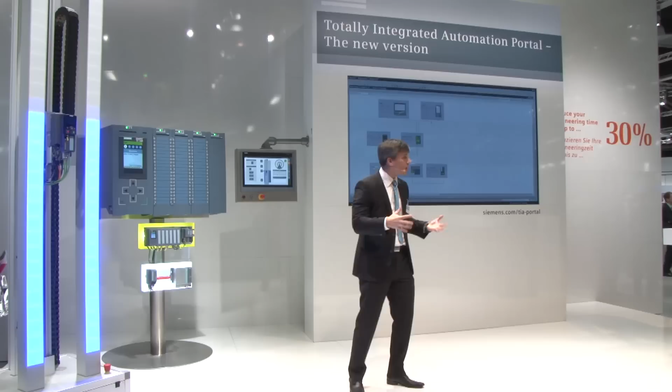For the first time, something we haven't shown is the network architecture, or something called topology view. All right, let's give focus to it. And so what is it? Essentially, every single connection from every single device, the first P1 to a P2 of device 1, device 2, we know all the interconnections on Profinet. So what does this give us? This gives us physical layer diagnostics for the entire network architecture directly in the engineering tool.

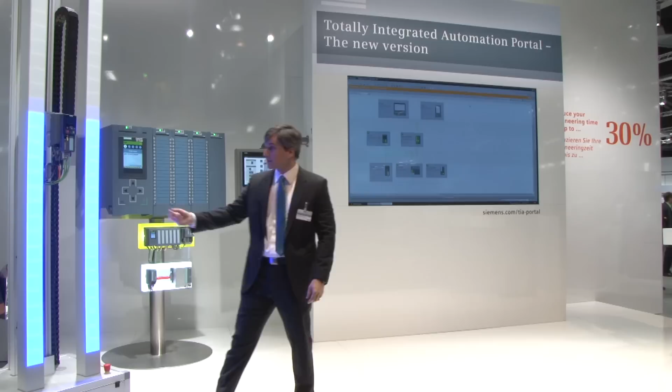All right, let's go online with it real quick, and let me show you what I mean. You get the orange bars across the top, so we are online with this actual project. And you can see the check marks and all the Profinet cables are highlighted in green. So for instance, if I come over to this drive real quick, let me pull out a Profinet cable, and you'll see that we have a network failure directly between the switch and that drive.

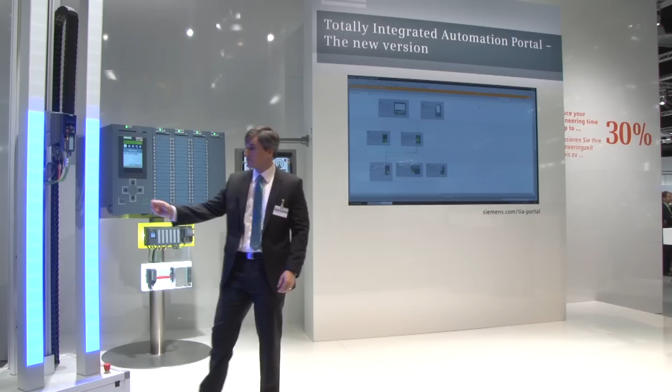That means if a tow motor was driving through here and knocked out a cable tray, you could go to the engineering tool and immediately find the network failure just like that. Solve your problem, get up and running, and mitigate the downtime. Problem solved. Trying to create engineering efficiencies in your daily work. That way, you can mitigate downtime in a service event, okay?

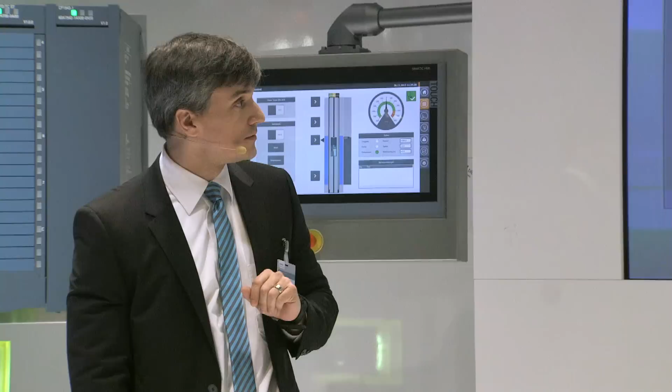So we've seen the network architecture, we've seen the hardware architecture, everything up here. Let's get this system up and running. So you can see from the comfort panel, we have something called Smart Access. That's how we're able to visualize this up here. And let's go back to the home position real quick. Get them up and running, turn power on, and go down to home position. Okay, so if we get the model running, let's see what happens. So it's kind of herky-jerky, something's wrong here.

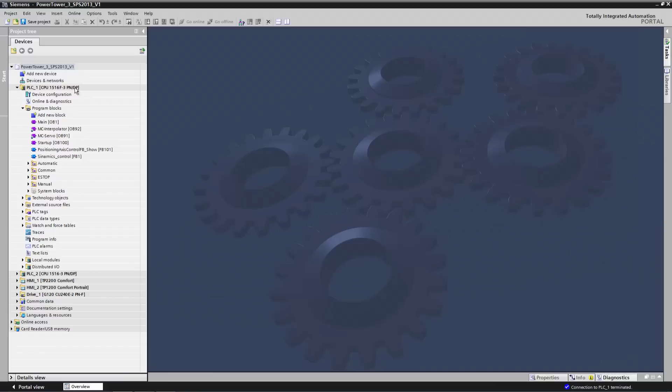Well, let's go back into the software and see if we can figure out what's going on. Let's go back online real quick, focus the CPU, go online. The orange bar across the top, and now you see we have some green bubbles here in the tree structure, but I noticed something right off the bat. You see one of them has a blue and orange bubble. So what that literally means to me from a visual standpoint is online and offline are different for that particular block. Let's investigate further.

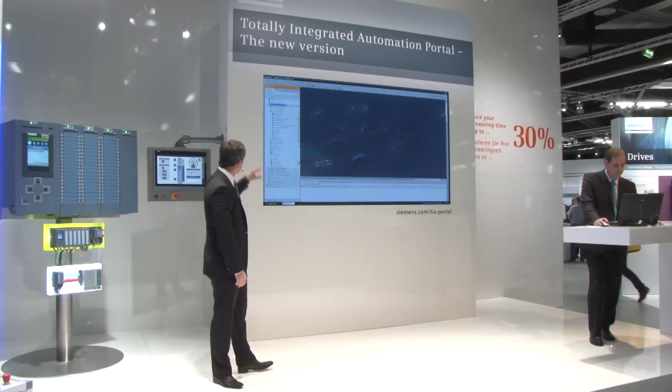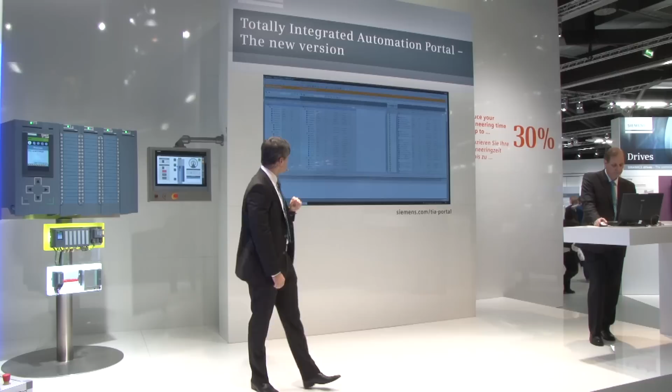Let's give focus to the CPU, and let's look at all the software components. Go to compare, online, offline. So now we're going to have a visual representation of all the software components for this entire project at this point. And for that matter, we could even filter. That way we could find individual problems, online, offline. So let's use the filter button. There's that FB1 again. We can still see there's a problem there.

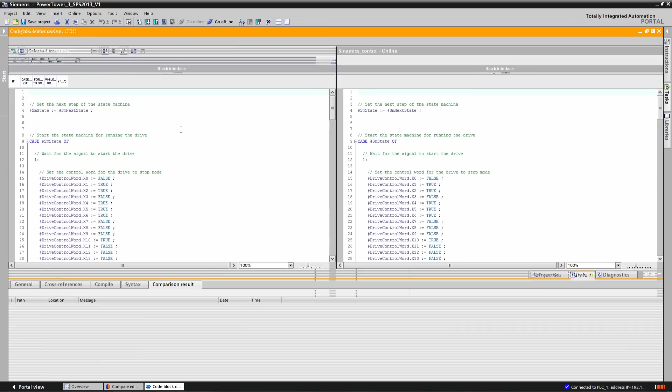Now if we want to investigate even further, we can go directly into that and look at the physical code in the blocks. So let's actually go do that now. You're going to see it, I believe it's SCL. Yep, it is SCL for online, offline. And now if you want to find the next potential difference between online and offline, we can use that icon. Let's go find it.

There it is. So we have a multiplication of 1.25 for the online program. I know for a fact that's not correct. I wrote the program. The offline is the master. So we've had some kind of unauthorized access and change of this program to solve a problem. Well, that's not what we want for this particular application. So let's go back and let's actually choose download to device. Let's execute it.

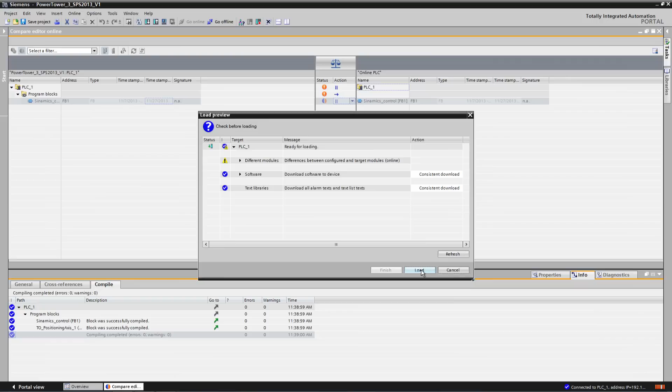Now it's going to compile the fact that we made this simple change. You'll see that we have this consistent download here. And what this means from the old generation to the new generation is in the new generation, we do the consistency download in the software, not in the hardware like we used to. So let's choose load. Now it's going to load to the 1516, and we'll click finish, and we've solved our software issue.

Okay, so since we had an unauthorized access, I want to make certain this doesn't happen again, right? We saw we clearly had some problems. There was some jerk in it. Well, we can actually add something called level 4 protection. Let's give focus to the actual CPU.

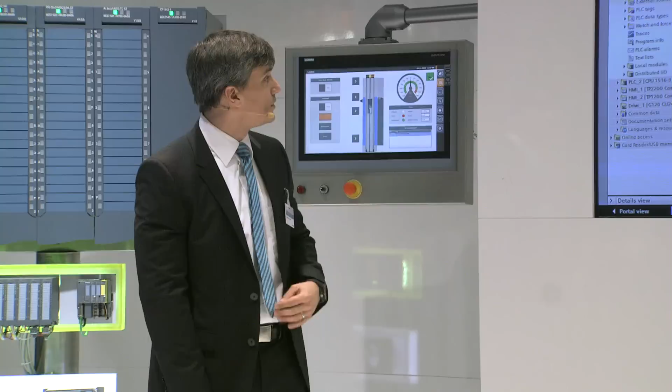Or we can show the know-how protection too. For instance, something different in our know-how protections, we have the ability to protect not only a single block, but the entire program. So if you're only concerned about the algorithm in one block, you can protect that block. Or if you're concerned about the entire process, you could highlight all and protect the entire process. So for instance, once you give focus to that particular block or the program, you click protect, add your passwords in, the block's locked down.

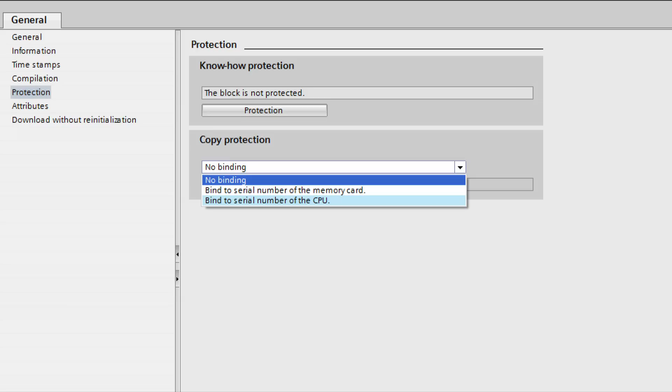You also have something called copy protection. The 1500 has to use a memory card. So what does this mean? We have the ability to bind the program to the serial number of the memory card, or you could bind the actual program to the serial number of the CPU, whichever you want. That way, somebody pulls that memory card out and you bound it to the CPU, guess what? They can put it in a different CPU, it's not going to work. The program blocks are not there.

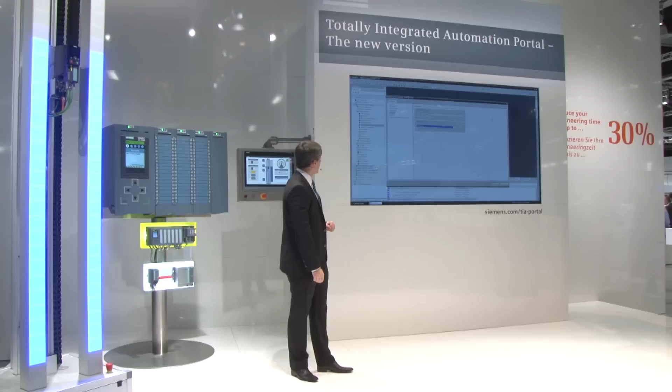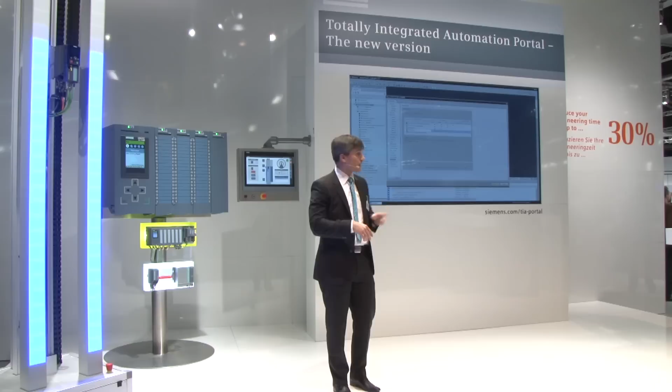All right, now let's actually do the access protection side of this. Give focus to CPU, click properties. You're going to notice down here at the bottom we have the protection level, and we see we have multiple levels available to us. The new one is this level 4 or HMI access protection. If we give focus to that, we have to give it a password. Of course, you have to confirm that password.

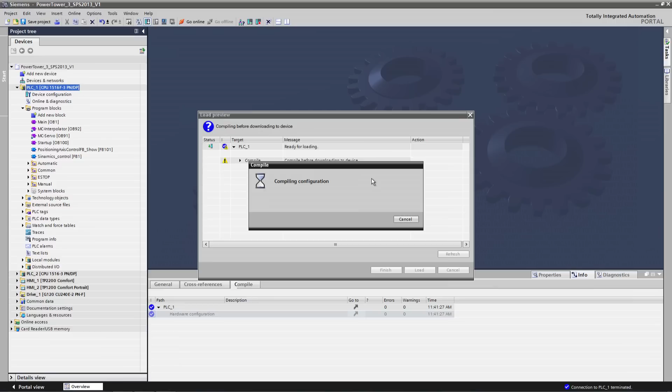Now let's say OK, and let's download to the controller. It's going to compile the fact we've added the password. And you see stop all, click on load. Of course, we've made an actual change, right? This password protection is an actual change to the program. Click finished, and now we've protected our CPU and changed the program.

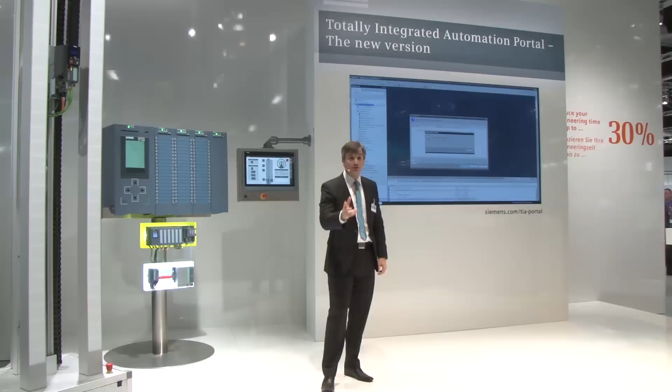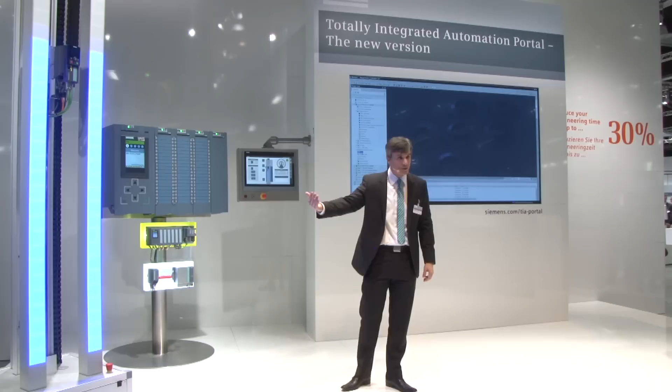Let's do a trace. How about that? Let's do something where we can look at actual variables coming from the drive and see if we can't figure out what's going on from the mechanical side. Well, if we go into trace real quick, we have the ability to have essentially an oscilloscope directly in the engineering tool, and you could even set this up if you have some kind of intermittent problem. Go away. You'll look at the variables you want to see if the trigger occurs. You could download this or view it actually. You could even download it to CSV file. That way you can solve your problems online or offline.

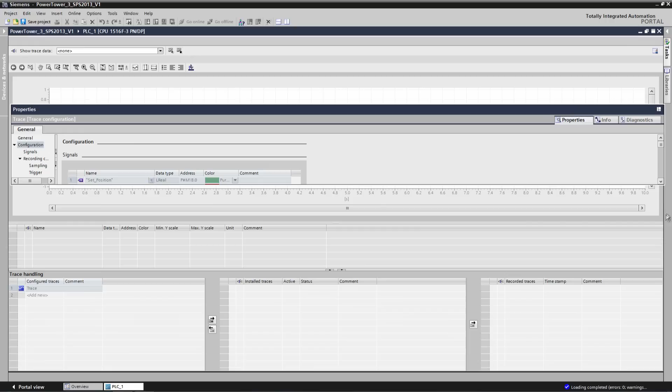If we give focus to that trace, we can actually go look and grab an individual predefined trace and load that in, so if you have multiple different types of traces you would like to use for a given potential problem. And in this particular one, you see we have a set position, a current position, speed, and axis error. Those are our variables we're going to look at. The sampling, you see it's for every one cycle, 100 milliseconds, we're actually going to make a sample for exactly 6 seconds. And our trigger, we're going to do 4 seconds before, 1,000 samples. So we'll know before and after whatever the event is.

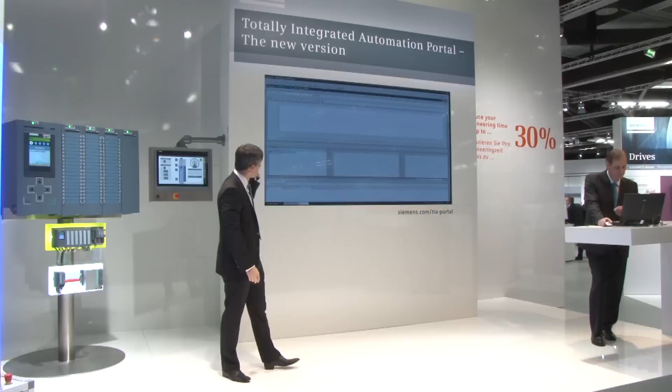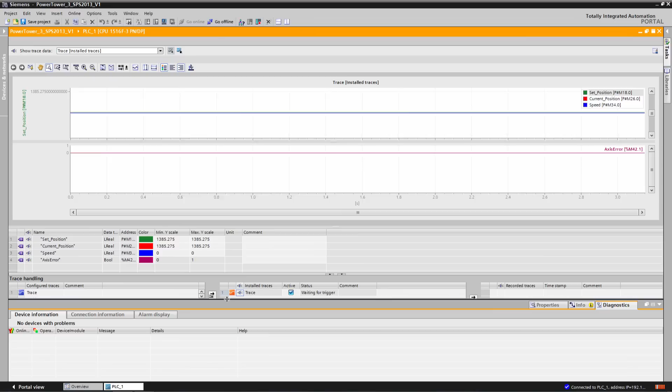Okay? All right, so let's give focus to the controller or trace, go online. Orange bars across the top again. Let's move it into the online mode, say OK, and you can make it active. You could have multiple traces, up to 4 in a 1500 controller. And now we're starting to trace something. So let's go over here, turn it on, and let's go back down to the home position. And let's go up to the top and see if we make it.

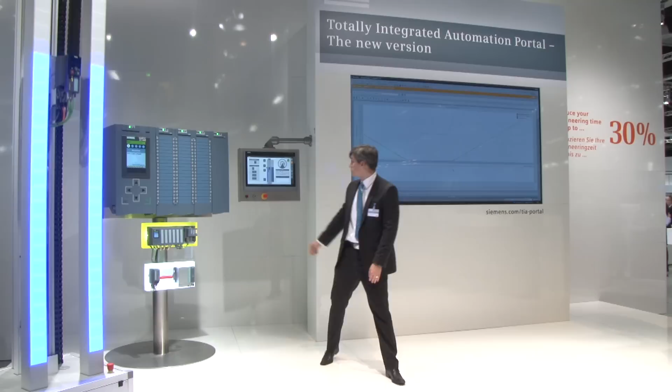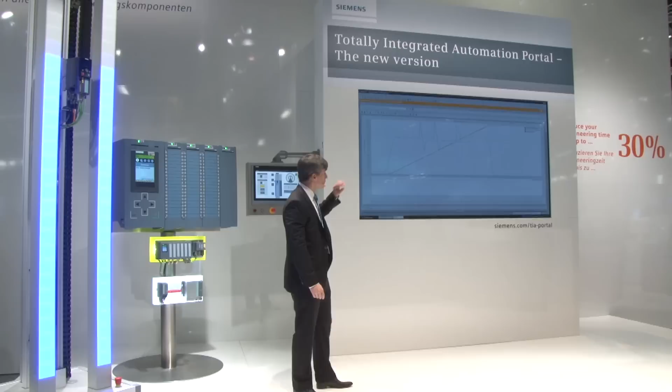So everything appears to be fine. Let's give it one more shot, see if we have any problem. Okay, so there is a problem still. All right, so we should have a trace now. Oh, perfect. There's a full set of analytic tools directly in the trace capability. You have the ability to look at every single data point if you want to. You can look at delta time, delta amplitude. You can zoom in and look at individual portions of that trace, as he has done here.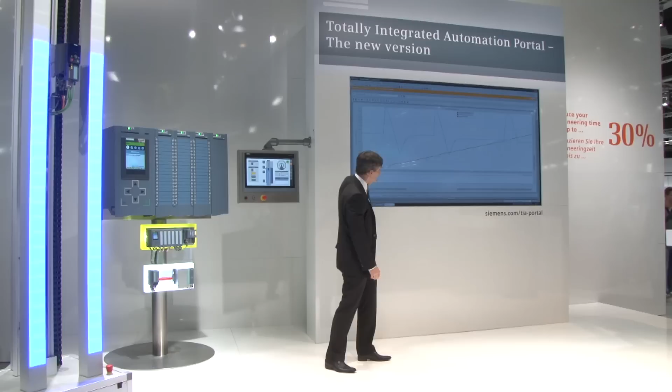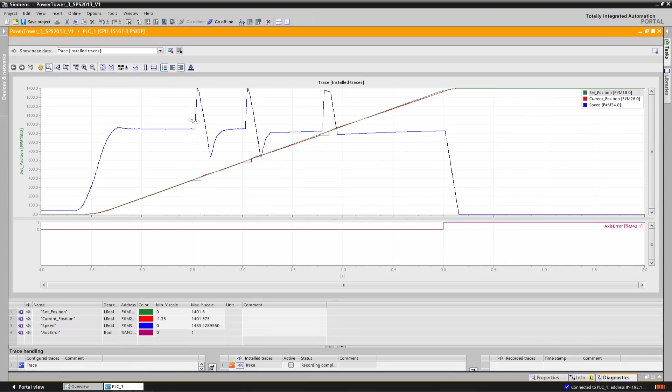You can clearly see the green line is where we're supposed to be. That's the position. The red line is the actual position. So you see some deviation here, these steps. The blue line is the speed. So every single time we have a deviation, the speed tries to ramp up to catch up. So something mechanically is going on here between, let's say, for instance, the encoder, the technology module. It could be a connection on the shielding. It could be the encoder itself. We get our mechanical guy. He goes in. He solves the problem on the encoder side. Get up and running. And away we go, right?

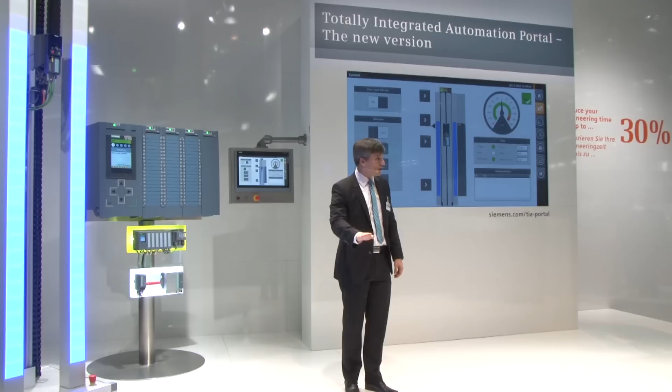Other diagnostics we could give you. The new diagnostic concept from the TIA Portal and the 1500 controller is we've actually moved the diagnostics to the firmware level of the controller. So what does this mean? This means that the software blocks are now not required. The diagnostics are at the firmware level. So you don't have additional soft blocks required to do diagnostics. This also means that even if the CPU's in the stop mode, you can see the diagnostics, solve the problem before you start the machine up, and don't create a problem during the machine startup.

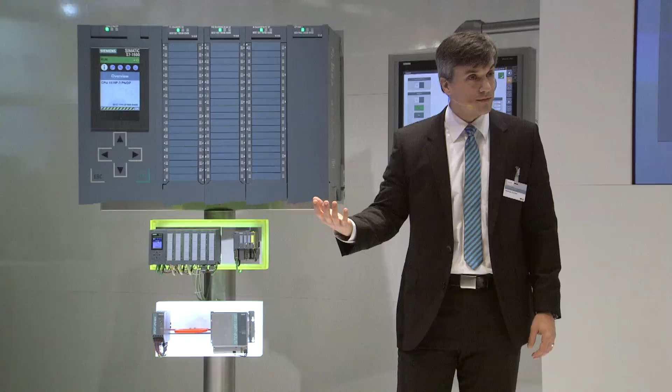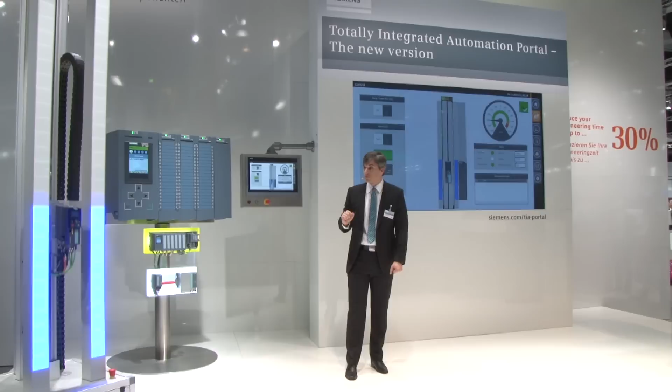Well, also, the drive, since it's integrated, we have diagnostics for it as well. Not just the I/O, the drive in this particular Profinet example. This potentiometer right here, we've got it set up to be an overload condition.

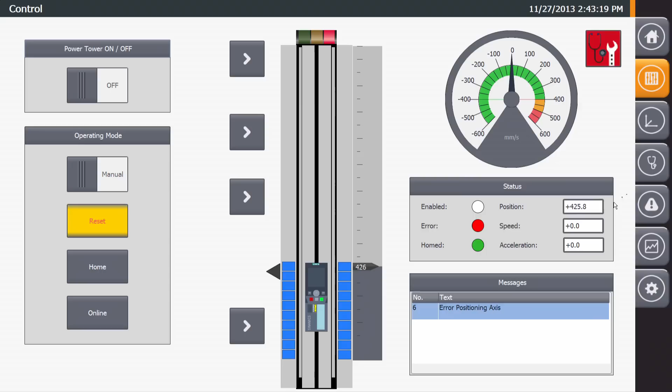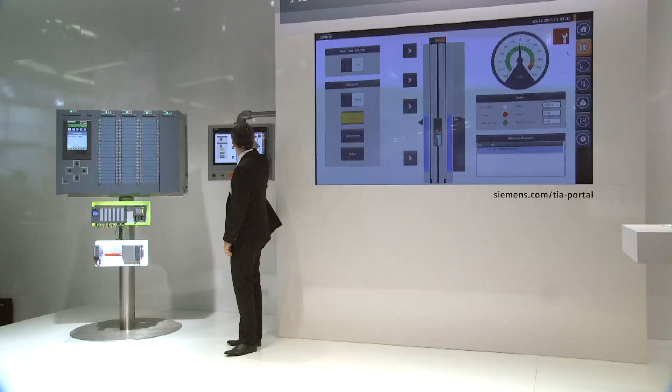So, for instance, you'll see automatically that we didn't hit our position. So there's an axis error because it didn't hit the final position it was supposed to go to most recently. The diagnostic indicator in the top right-hand corner has turned red, and there's a wrench. If we give focus to this, we'll go automatically to the message, and we'll clearly see that there is a motor overload condition for this particular drive. And I can even see the part number, exactly where it is in the Profinet architecture. And in fact, I can see some potential reasons on how we can solve this particular issue.

You may notice something as well. I use swipe technology on this panel. That's something new we're doing from a functional capability in our panels. That way the user can use it the way they think would be most intuitive. Let me solve our problem.

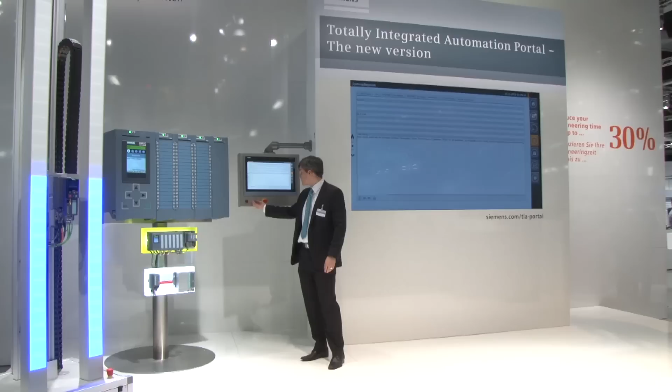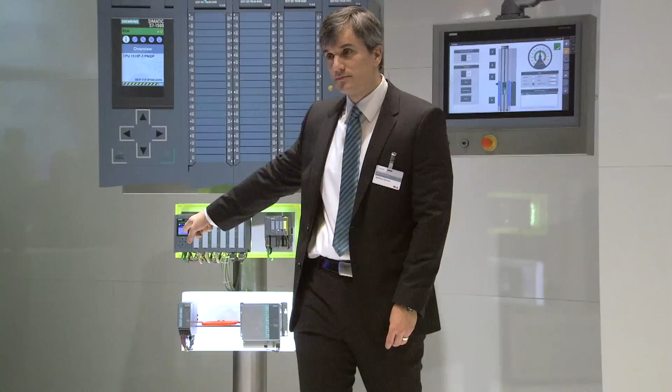And how about this UPS? So we showed you even the drives have diagnostics coming into our portal and the ActiveX controls on our panels. How about this UPS? It's on Profinet as well. Well, we can get diagnostics out of him just the same way. So for instance, if I come over here and pull the handle, you'll see that the battery connection to the UPS has failed. There's no doubt that's correct. I'm holding the connection in my hand, right?

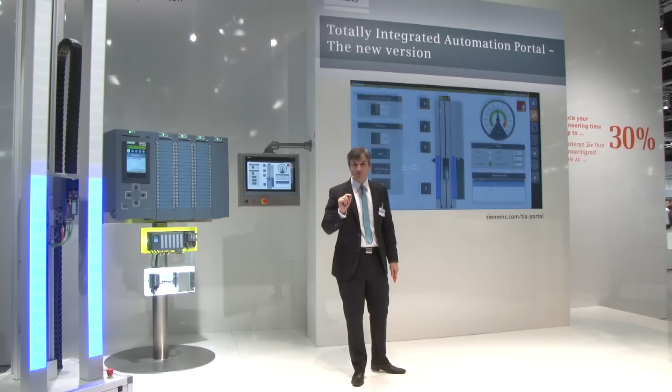Well, also we have the ability from the new diagnostic concept to have this not only in the ActiveX control in the diagnostic viewer up here on the panel, we can also have it on the display on the 1500, and we can have it in the engineering tool as well as on the web server. So you don't have to have a panel to see these diagnostics. Display or here, you can see it essentially for free, right? It comes with. If we just go into this actual web server, you can clearly see there is an error.

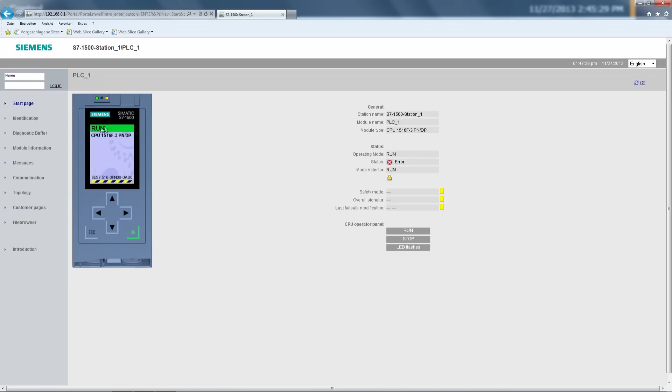There's no doubt. The photorealistic view of the 1500, go to module information, dive down through the Profinet architecture, find the UPS, click on it one more time. You'll see that it created a maintenance demand the moment that it realized this was gone, and then it created an actual error, the fact that the connection to the battery was interrupted. Correct. I can prove it. It's in my hand. So let's go solve our problem, replace our battery, whatever the case may be.

And that means even the power components that are powering the system are integrated from a diagnostic concept. Not only the drive, but even the power side. Everything we can possibly give you, that way you can mitigate downtime, create engineering efficiencies in your daily work. That's what we're trying to build into the system. Okay, so we've shown you all kinds of diagnostics. We've shown you all kinds of user tools to help solve problems.

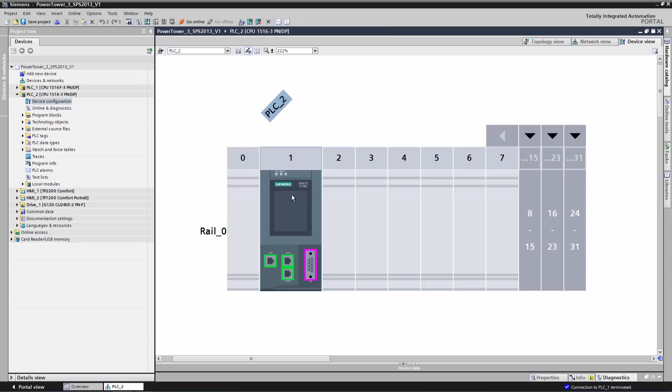Something else that we want to show you from an engineering standpoint. For the first time, we're showing the fail-safe 1500 controller here at SPS 2013. So for instance, how can we easily integrate that into our current project? Well, if we go back and give focus to the PLC2, you'll clearly see this is a standard CPU. There's no yellow bar across the top to indicate that it is a fail-safe controller. It's quite easy to change this into a fail-safe controller.

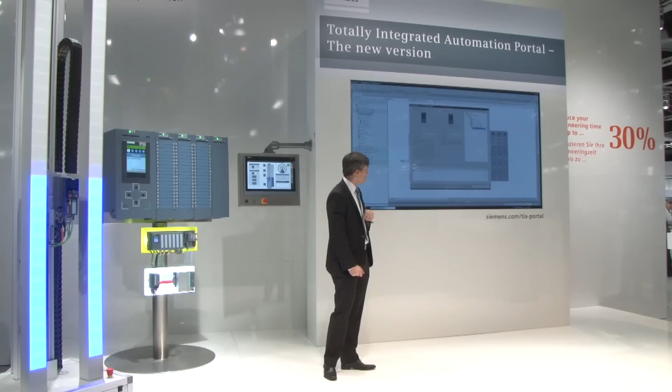Just give focus to it, right-click, choose Change Device. The pop-up gives you the opportunity to find another like device. Go find the fail-safe controller, have a side-by-side. If we click OK, you're going to notice automatically we get the yellow bar across the top. Once it updates, there it is.

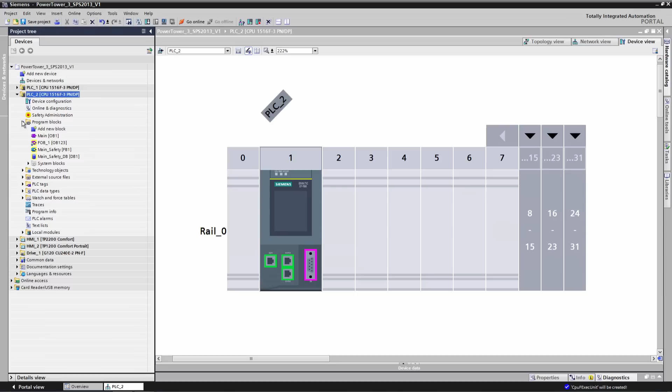Also, you'll notice in the tree structure, we've automatically added the Safety Administration, including other fail-safe blocks required to do a fail-safe program. If we give focus to the Safety Administration, go to the F runtime group, you see that this has been added. So in order to actually run a fail-safe program, it's automatically been added into the program.

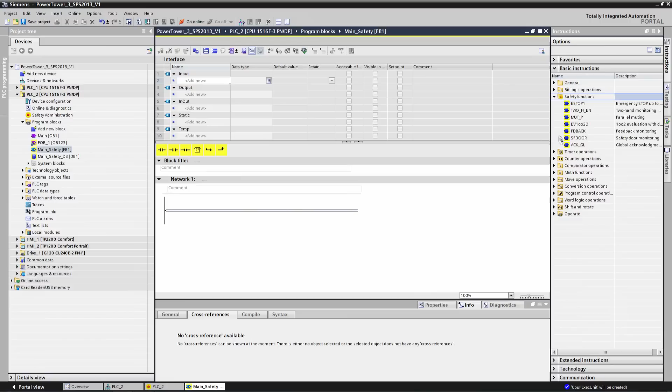And in fact, if we actually go to the main FB1 fail-safe, open up the instructions, grab the e-stop that's been added now, and the other safety instructions, drag it in, accept the default data block. You'll notice even the code side is highlighted in yellow. So you'll know instantly everything that's standard and fail-safe by the designation of yellow in it, whether it's code or hardware.